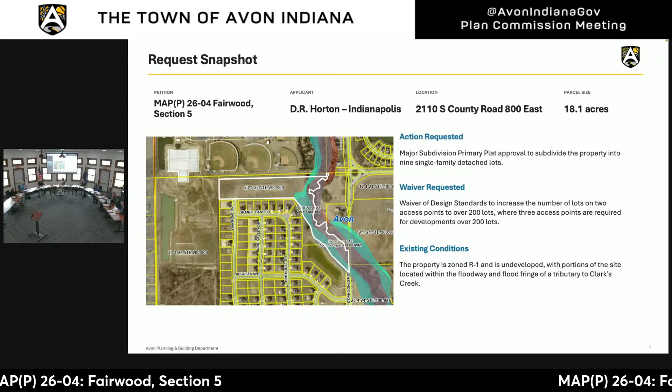Again, this is the location here: Dan Jones, Bradford, or 200 South. This is the high school property here. The high school is developing further south here.

This is an undeveloped section of, I can't think of the name of that subdivision. This one. Settlement over here, Settlement West. And then this piece in here is a town-owned property that we're eyeing up for future park development.

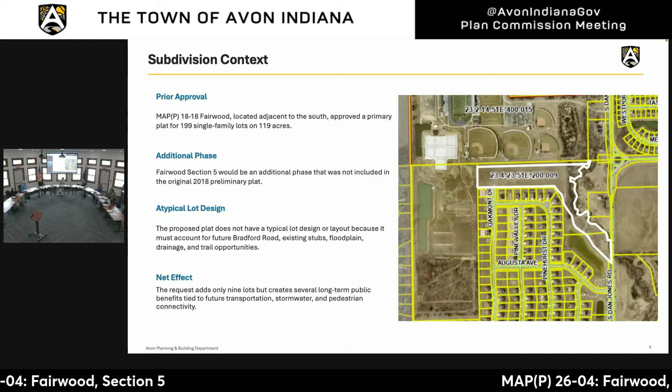So again, this would be Section 5, which would be added on to the 4 sections in the existing Fairwood subdivision. This is an atypical lot design, and it calls for the type of lots proposed, called MU lots, or MEW lots.

What that proposes is lots fronting on a common area, with alley-type access in the back, instead of a standard traditional front-load garage. They would have side-load garages accessing a private alley that the town would not maintain, and then front on a common area to the north, with future Bradford Road extended beyond that.

Oakmont Drive is this north-south road that's existing, and it currently stubs right here, so it would be extended 2 lots to the north. These 2 lots would be traditional lots with front-load garages, and then 7 new lots on this extended Bradford Road in the future.

Most lots require public street frontage and access, but the ordinance does recognize mew lots and provides for them. So it is a legal type of development to have lots front on a common area. Again, the alley would be private, maintained by the homeowners.

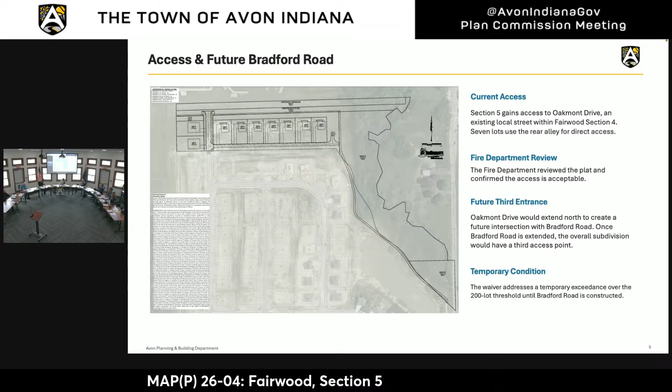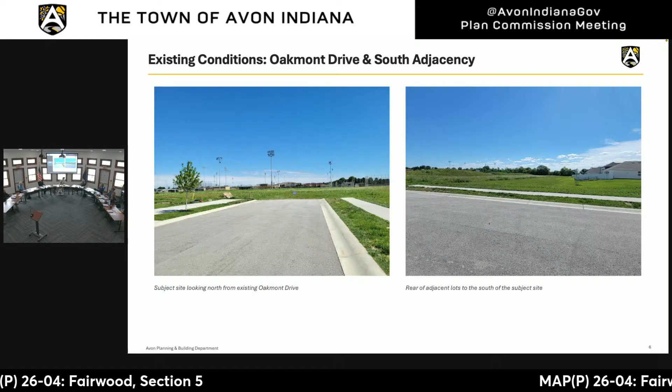And then this is kind of where the private alley would go in. This is looking west towards more of the high school property from the stub, just looking across at the high school stadium—or no, that's again looking to the east, sorry.

Again, blocks A and B would be transferred to the town. It's approximately 5.93 acres that the town would acquire.

We do think it's a public benefit because it would allow for long-term management of the natural drainage and floodplain in that area. Having access to it and control of it makes it more beneficial, because the town can ensure that the floodplain is maintained properly, and we can beautify it more with future park or greenway development.

Sidewalks would be provided along future Bradford Road, along Oakmont Drive, and then the trail extension coming down through that would connect down to Dan Jones.

Again, this would connect to the overall trail system we have throughout the southern part of Avon, and this piece of land here, the town already owns, eyeing it up for park development.

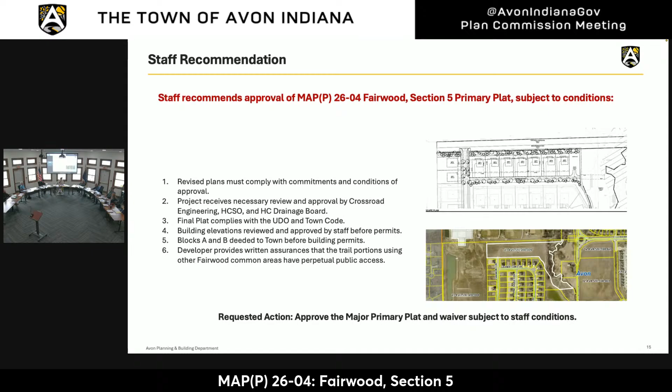Just to confirm what I'm hearing, the waiver would only be temporary in terms of once that entrance into Bradford Road is in place, it won't be in violation of any ordinance. Correct. So it's just to allow for these to be built until that entrance can be built. Okay.

Have we been given any indication as to how long this temporary issue would be in terms of a timeline? We don't have a timeline in place for Bradford Road. We still have to do engineering there, there's the creek, the tributary to Clark's Creek.

The bridge has yet to be engineered, and there's still some ongoing conversations with the school about where their entrances need to be. That's why we don't want the road constructed at this point, because we have to do a lot more engineering. That bridge may change depending on how it's going to cross the creek, the best point to cross the creek, as well as the roundabout that it will connect to.

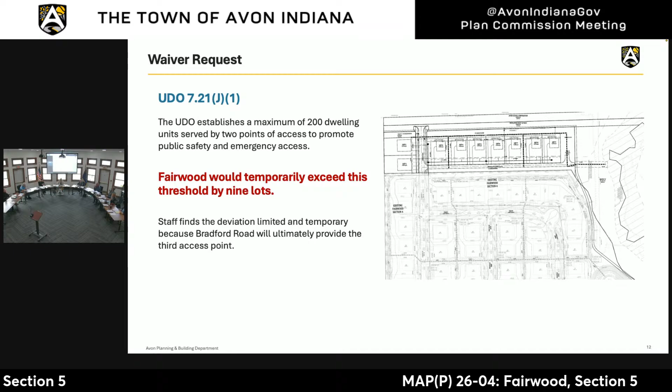So that's one of the reasons why it's more of a holding pattern right now, and we didn't want anything except for the right-of-way that they're going to be dedicating for it. Thank you. Can you go back to one of your original slides? That one there.

Just to give everybody a little history, the town and the school have talked at one time before about the property to the west, which is the Grundy property. The school was looking to buy it and subsequently worked out an opportunity with Pulte Homes. So the school does own the Grundy property. But when we were going to run that road through there, they wanted to run it through that subdivision. And one of the concerns was traffic and safety.

Kids coming out of that high school parking lot, cutting through there, or people finding out that Bradford goes west, will cut through that parking lot. So that was an issue. I don't know where that stands now because they do own it now. And I know at one time they were going to build some tennis courts over there, which subsequently are there in that white box now. So I don't think there's a need anymore, but I'm not speaking for the school.

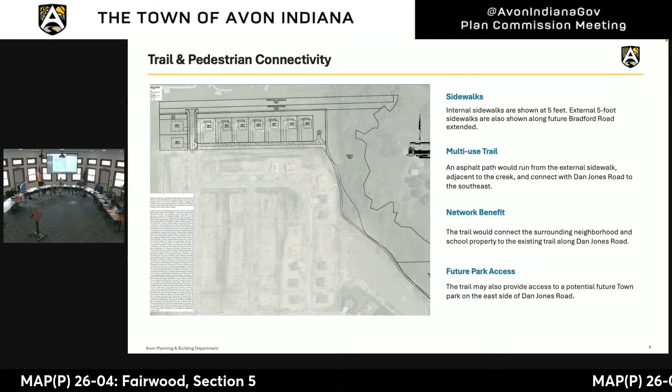Good evening, Steve Brehub, Banning Engineering, 853 Columbia Road, Plainfield, Indiana, 46168.

This is an odd piece of property, a remnant piece of property. We have worked with the staff and with the Public Works Director quite a bit to come up with this configuration so that D.R. Horton can finish out this area, and that right-of-way for Bradford Road can be dedicated, and property along the creek can be donated to the town. So we've tried to come up with as much benefit for all parties involved as we could.

The thing that is so peculiar about this to me, and the need for the waiver, is the fact that a road that was in existence and stubbed to the property when Fairwood was developed was decided not to make a connection. Had that connection been made, we wouldn't be having this discussion, and the future extension of Bradford Road would be a fourth connection to the development.

So it's probably not an ideal situation. We always talk about connecting road stubs when roads are stubbed to properties, but that's how this one played out. I don't have much more to add, and I would be happy to answer any questions you have.

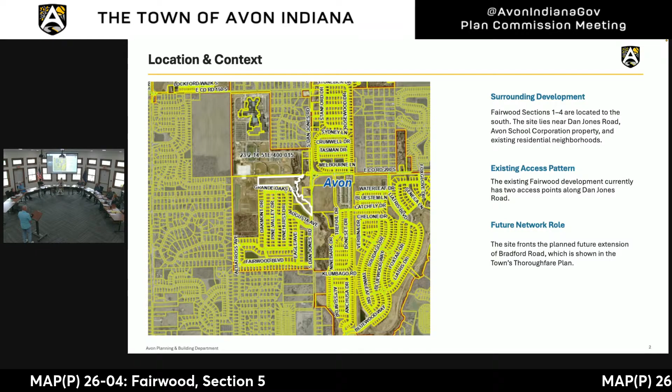What is the purpose of using the mew design as opposed to what has been used elsewhere in the division? I think ultimately, when Bradford Road is extended through, the best outcome for the area would be homes fronting on Bradford, but not having driveways on Bradford, because Bradford is going to be a collector street. I think it's a better streetscape having those homes front, as opposed to their backyards backing up to Bradford. So that was really one of the reasons we went with this design. We're trying to design around something that's not there yet, but will be there in the future. I could add that it was actually a planning staff request that the homes front Bradford to make it look better when Bradford does go through.

Right, thank you. I've got a couple questions for you, Steve. These 7 lots, are those single-family homes, townhomes, or what? They're single-family homes, just like the homes in the other sections of Fairwood, except they'll all have side-load garages. So are we going to be covered under the anti-monotony rule then? That's standard in the ordinance, and yes, because everyone's going to see those houses—in this case it'll be the fronts versus the backs, but they're all the same—it would be covered by the UDO's monotony rule.

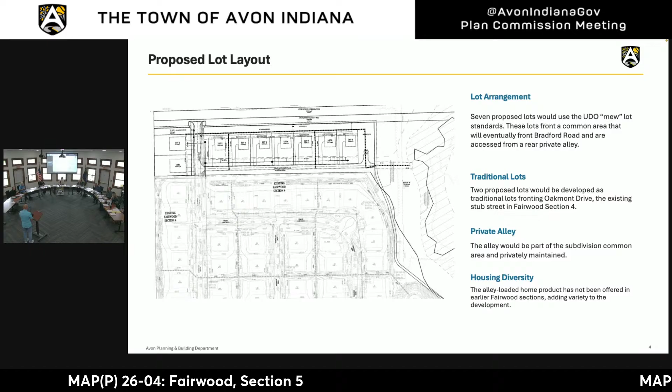So I have a question. If you look at the basic lot design, essentially those houses that are supposed to front Bradford Road are blocked by trees, right? There's planned to be trees planted and all that. I wouldn't say blocked, but there are trees along the front, and it's actually a UDO requirement to have a streetscape along the front.

On this drawing there are two lines—the Avon School Corporation line and the southern part of Bradford Road associated with this. Is that already an easement from Avon, or is that what the negotiation has to be? Is there already a road easement there with Avon? I don't think so, I wouldn't think there is. There is a strip of property there that's separated from the rest of their property, but it's still owned by the school. The intention, and they are aware, is that the strip would become the other half of the road.

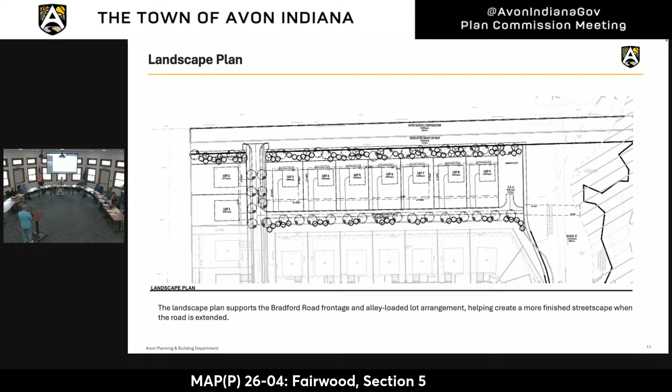And how close is that line to those ball fields? It looks like it's right on top of the ball field. It's quite a ways from the ball fields. If you go there, you can see the dugout—first one, there you go. I can't zoom into that, but the yellow line is the northern half of their small strip parcel. The yellow line is the northern half of the road. That's the start of the Avon property, right? The dedicated part of the road that the town would now control would be in the white area. Between the white area and the yellow area is a separate parcel that the school owns, but it's separated for this purpose. So the yellow line would be as far north as it would go.

So the way I see this property, essentially this is a permanent waiver—there's no plans, no property acquired, no engineering for the road or the bridge, and putting in a bridge isn't going to be cheap for 7 houses. So I think the commission should be aware that it's effectively a permanent easement, or should portray it as such, even though there's potential that in some number of years it could change. Right, and I would agree with you.

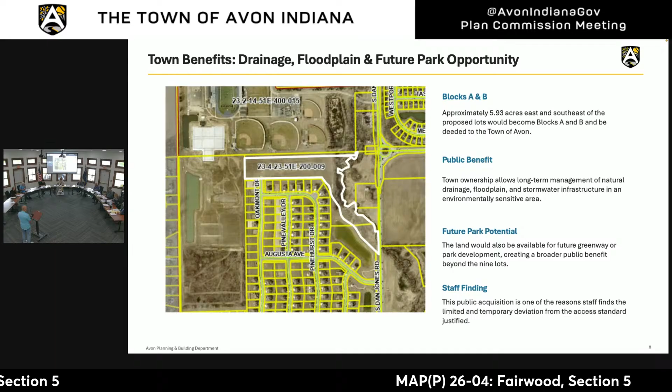Second. Having heard a motion and a second, we'll now take a vote. Kuchenberger, aye. Zuzen, aye. Rockabrand, aye. Reed, aye. Kaufman, aye. Ransberg, aye. Motion carries and MAP 2604 is approved.

We now moved on to, waiver, I'm sorry, waiver A is approved. Thank you. We now move on to preliminary approval of major subdivision plan, MAP 2604.

I move that we approve MAP 26-04 Fairwood, Section 5, a request to subdivide 18.1 acres into 9 lots and 2 blocks, subject to the conditions listed in the staff report, since it has satisfied all the requirements for preliminary approval of a major plat under state law and subject to the approved findings of fact.

Having heard a motion, do we have a second? Second. Having had a motion and a second, we'll now take a vote. Reed, aye. Rockabrand, aye. Zuzen, aye. Guckenberger, aye. Ransberg, aye. Kaufman, aye. Motion carries and MAP 2604 is approved. Thank you for your time.

We now move on to DPR 2609. Thank you, President Ransberg, members of the commission. DPR 2609 is a development plan review request to provide for construction of a roughly 15,000 square foot indoor recreation building, along with 4 waiver requests: 1 of development standards and 3 of design standards.

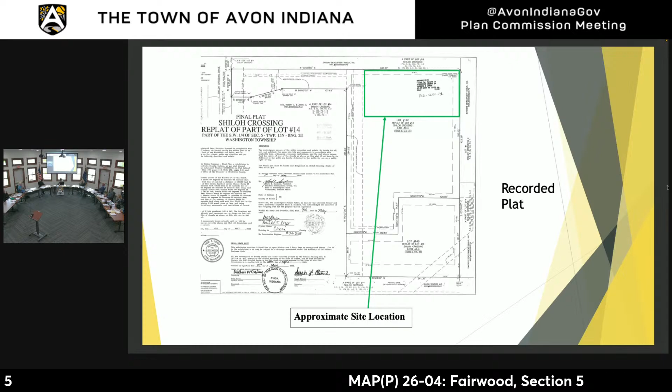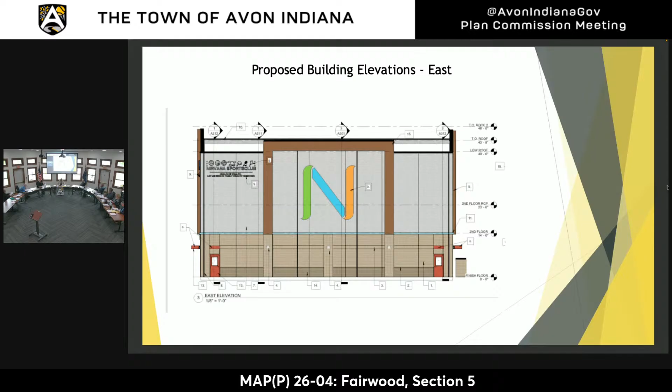So again, it's a request for approval of development plan review for approximately 15,000 square foot building with 1 waiver of development standards and 3 waivers of design standards. We'll talk about the waivers, which you'll have to act on before you could act on the development plan review.

Starting with waiver A, a waiver of development standards of UDO 6.5A to waive the foundation planting requirement adjacent to the entire south facade and part of the west facade, where a 5-foot wide landscape area is required around the perimeter, excluding access points to the building.

So for a development standards waiver, you have 5 required findings, which are outlined in more detail in your staff report, both the petitioner's response and staff comment, but I'm going to go through these. The first required finding is that it not be detrimental to public health, safety, and welfare.

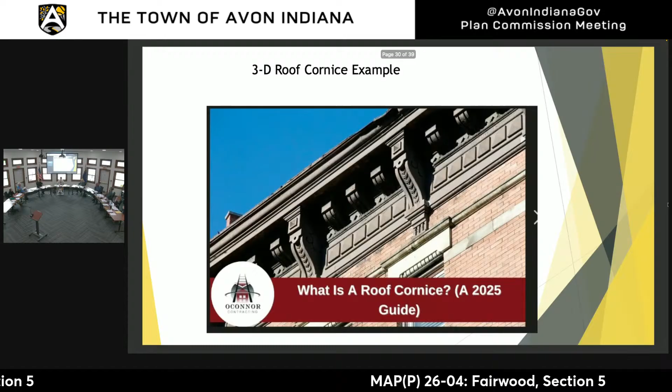We think the other architectural standards are intended to result in a building design that doesn't constitute a single large building mass. So when we look back at the building elevations, and understanding there's a notch in the center of this west facade, that actually would have the type of relief that the ordinance requests.

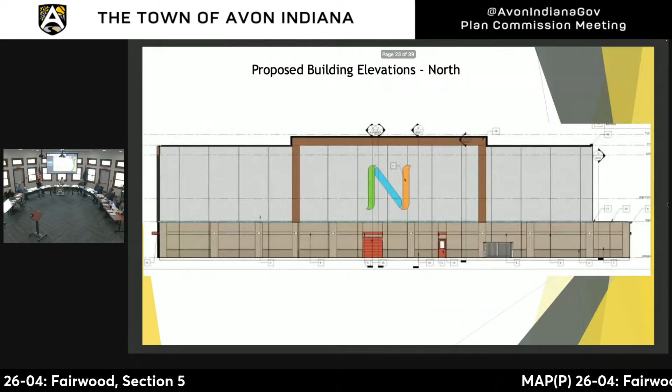But looking especially at the south facade, where there would be no foundation plantings, you've got a 48-foot tall building with no articulation. Despite the fact that this reveal and a color change has been added, which adds a little bit of a perception of depth, it doesn't go anywhere near what the ordinance requires.

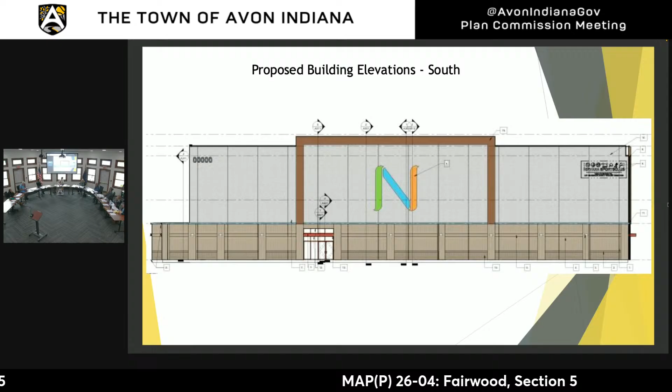And so for those reasons, we believe that the spirit of the ordinance and the intent of the ordinance would not be met, and we think waivers A through C demonstrate that. So we don't support any of those waivers.

We think a potential solution would be, if they need this size of building footprint to do what they want on the inside, perhaps they could acquire some additional land. Looking back at even this picture, if you've been to the movie theater, it's pretty clear everybody parks out front. Maybe a few cars park over here, but this isn't really used or needed.

And again, the movie theater has several hundred parking spaces more than what is required. Now obviously that's private property. They're under no obligation to come to any agreement other than agreements already made to allow for shared parking. They're not under any obligation to sell part of their property.

But that would be a potential solution if the petitioner needs to build as large a building as they're proposing - to acquire a strip of land that would allow them to build the size they want and still push it back another 5 feet to meet the foundation planting requirement on the south, as well as another 6 feet potentially to provide the 3 feet of projection or recess on both the north and south ends. So you're really talking about a matter of potentially 11 feet of space that they would need to both design the building and provide the landscaping the ordinance requires.

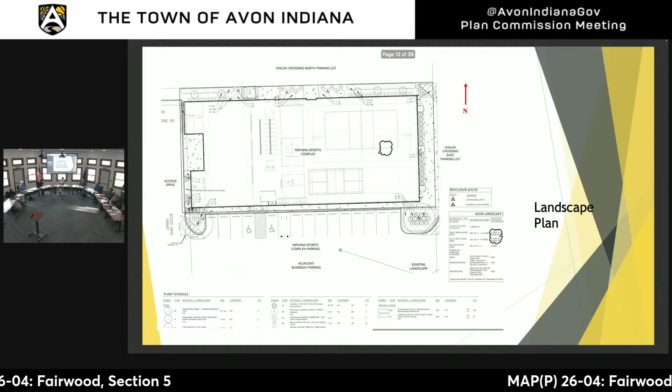Okay, I have a question about the sidewalk too. The building to the west, is there already a sidewalk there? So they'd be connecting to that sidewalk? No. Can you go back? Let's see if we can find that one. Oh, that's not it, okay, I got it back here. We're almost there.

I'm confused, there was... okay, so you're talking about the area where the arrows are pointing? Two arrows, is there any walkway coming in there? No, there's no walkway coming in there currently. That would need to be constructed on the common area, which we believe is what you're proposing.

Right, we don't see any reason that couldn't be done because the common area serves all of these properties. So why wasn't the building to the west, the building to the south, held to that requirement? Oh, good question.

So when this building was constructed in 2008, we were operating under the old zoning ordinance, and it did not have the requirement to integrate an interior and exterior pedestrian network. So it wasn't a requirement at that time. It wasn't imposed, and they could have chosen to do it, but it wasn't something the town could require.

Okay, and then the next building over, the west building, it seems like a lot of times when we see a development, they'll have the sidewalk at the edge of their property, and it kind of seems like that's the edge of their property.

Yeah, so there's a sidewalk along Shiloh Crossing Drive here. Right there? Yeah, they wouldn't have been required to build sidewalk out there either under the old zoning ordinance. So they were under the old ordinance as well. Correct.

Couple of questions — that existing building to the west, the big square building, what is that? I believe it's a church. It's a church, yes. I believe that was originally constructed as, or at least in the past was, a Christian bookstore. Was the old Christian bookstore.

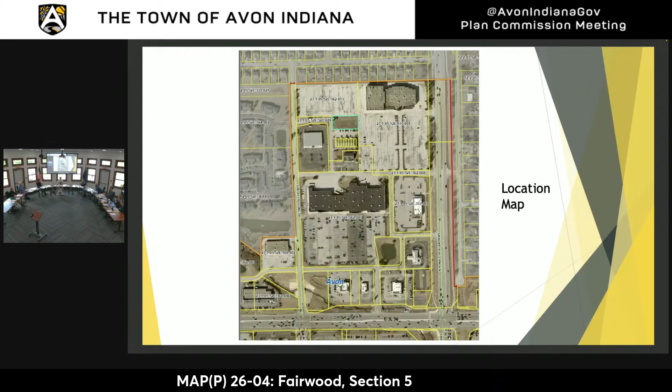So they don't have to deal with those standards, but we do have still commercial architecture standards in Chapter 7, Article 10, and so they do need to comply with those. They did actually make some revisions to the elevations after TAC review in order to make sure that they were meeting those requirements. Okay, thank you for the clarification. You're welcome.

So you mentioned earlier that the petitioner has indicated that they would be willing to work to meet the requirements or to not ask for waiver D. So is there going to be a withdrawal of the request for waiver D, or do you want to keep it in place? That would be a question to address to the petitioner. Okay.

Any more questions for staff? If not, we'll have the petitioner come forward.

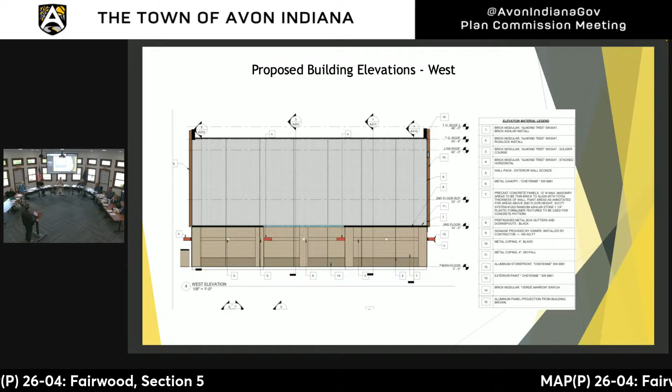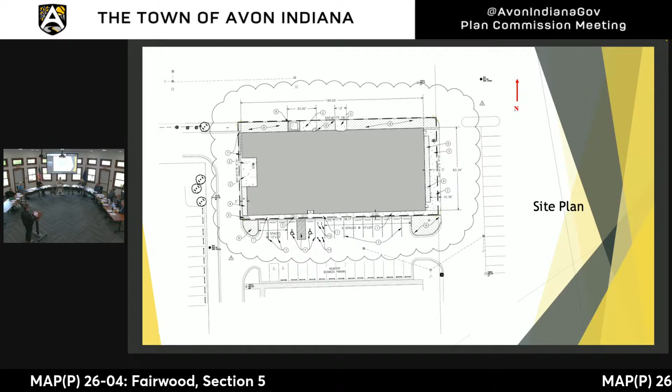To answer the question and go backwards on the waivers: waiver D is the pedestrian connection to the public way. The owners have expressed interest in working with the HOA on establishing that connection. However that gets handled, it may relate to the other three waivers as well, as far as next steps—whether it's a conditional approval or a continuance. I can turn the floor back over to you after I've let the owners speak. So that would be waiver D.

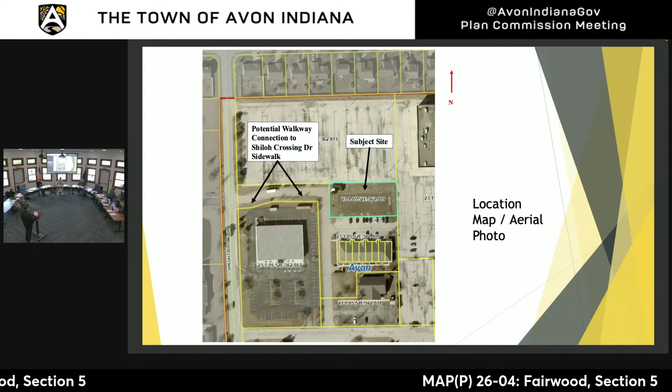Waiver C, the two roof features—we would like to work with the planning staff on eliminating that waiver as well, with some design effort to achieve that. So our intent is to have that one drop off as well.

The others, waiver B, the articulation, which may loosely tie in with waiver A, the foundation planting—we would need a little time to work that in, ideally having those two waivers drop off in full, depending on our efforts with the owners and finding that comfort level. I can't promise it would drop off fully, or if we'd still need to hold onto those waivers, but perhaps improve upon them so we're not asking for the full boat, working with ourselves and planning staff to represent those two.

Right now those are probably the open items that will be more difficult, whether it's building position in combination with facade offsets. Those two will probably need a little more work and effort. I'll turn the floor over to the owners and let them introduce themselves.

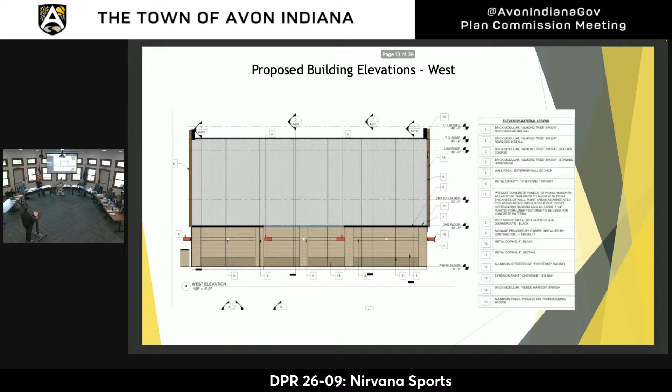Before you go—are you formally requesting withdrawal of waivers C and D? I'll let them speak first and then I can respond to that. Yes. Okay, thank you.

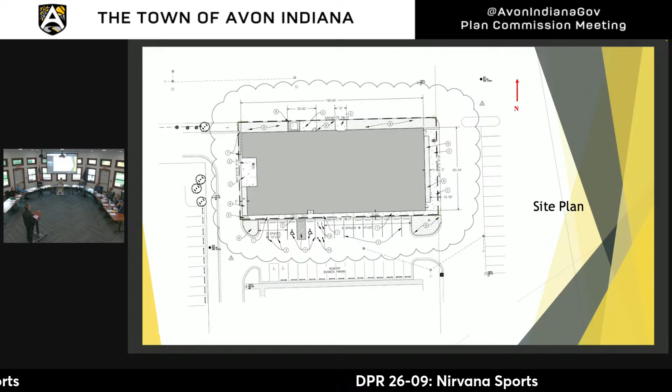Thank you. So can we clarify, is this us voting for a continuance, not a request of the petitioner? Is it the board doing the continuance? Well, I think you were asking the petitioner whether they would request a continuance, and I think that's the consensus. So obviously if you want to continue on your own you can, but I think you're asking the petitioner to request the continuance, and I think they're doing that. And they can only request one continuance, right? They're only entitled to one. They can request as many, I see, but if they request one they're entitled to that automatically.

Okay, and I think we should grant it. I will even say I would support if you find that you need to continue it again, because I would want the town to work with you to bring this business in, because I think it's a good addition to the community. I think it's a great position. So I'll make a motion to continue DPR 26-09 Nirvana Sports to our July 27th, 2026 meeting.

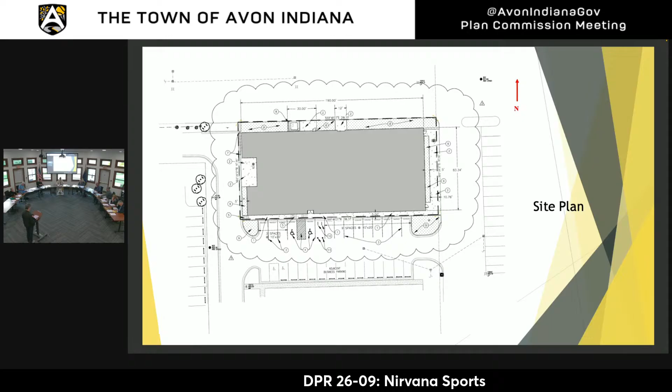I'll second. Having heard a motion and a second, we'll now take a vote. Guggenberger, aye. Zuzen, aye. Rockabrand, aye. Reed, Kaufman, aye. Ransberg, aye.

Motion is carried, and this petition will now be heard on July 27th. I think we're all looking forward to working with you, and looking forward to seeing this new addition to Avon. Likewise, thank you very much. Appreciate your time. Okay, thank you.

Any other business? We do not. Committee reports: BZA, we heard one case, a special exception for a car wash in the 36 overlay, and that was denied. Redevelopment, in addition to our invoice approvals, we awarded the bid for County Road 525 East improvements, and also a rebate report for the economic development lease rental bond. Anything from the town? No. Okay, if there's nothing else to be heard, we are now adjourned.